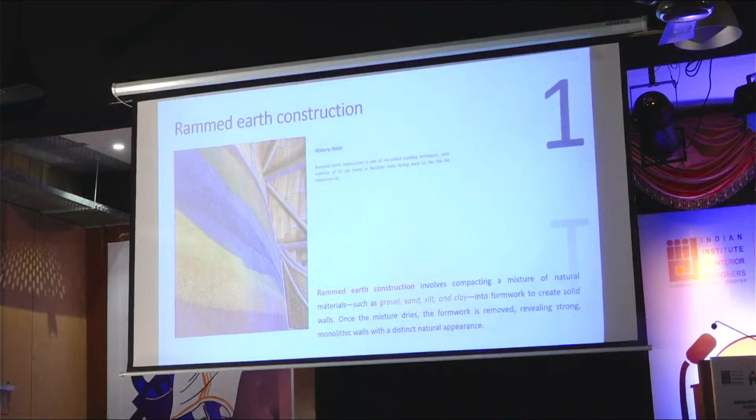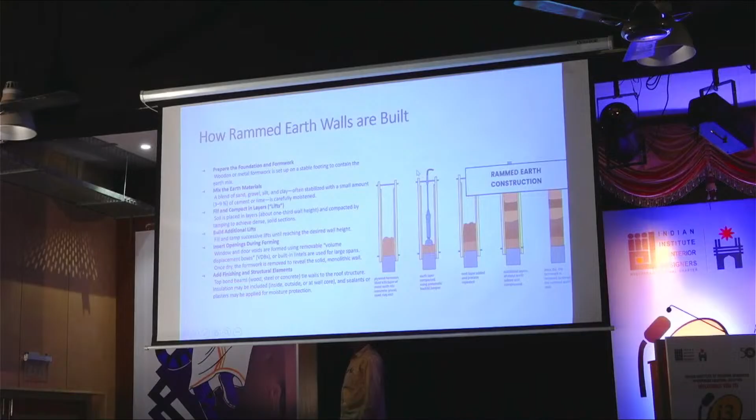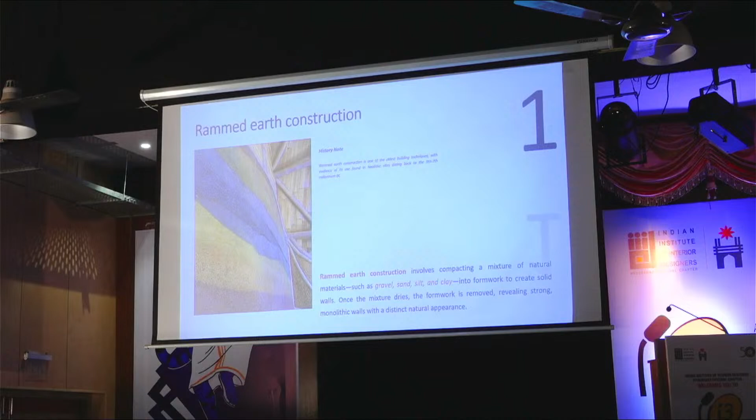So now coming back, let's come back to the picture. This is, you have seen, the history of this material is still there. We have used them in history, like in the Great Wall of China, Spain, and even Mohenjo-daro. Those structures are still active because it was just rammed up. Imagine 5,000 years, more than that, and it's still there.

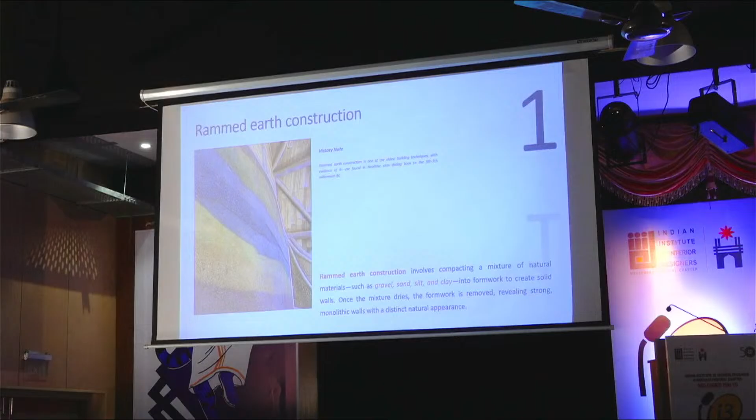Even in our villages, around the villages, we find them a lot here. If you go surrounding Hyderabad, we've seen this, and they have rammed it up, and the roofing system is done in stone. So coming back, next is, of course, this is the method they use, and this is how the sections and all are done.

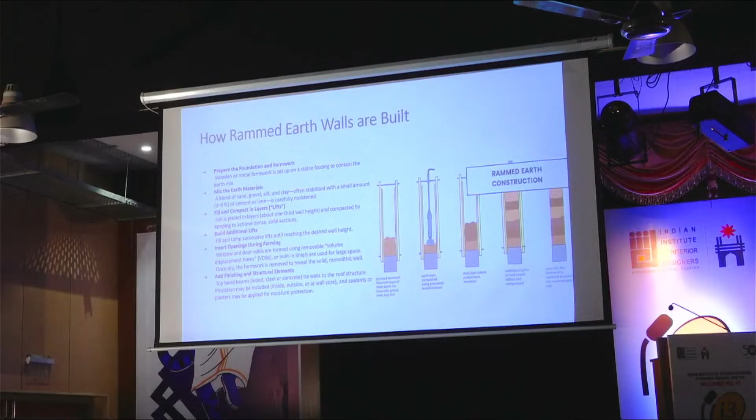So we can use pigments and all here to make it, where you can apply up to 4 feet. That's coming back, I mean this is what the technology is all about.

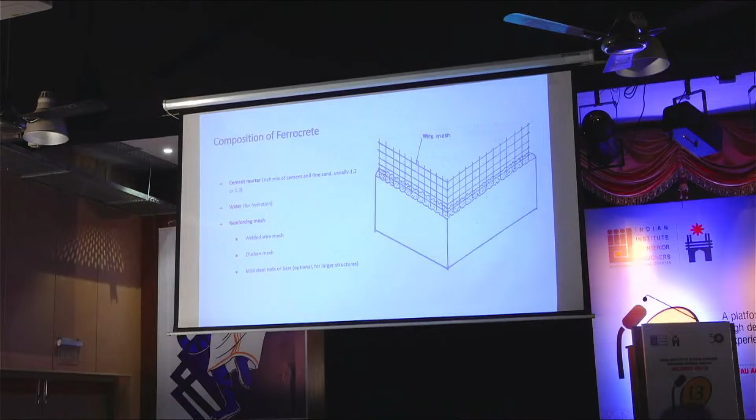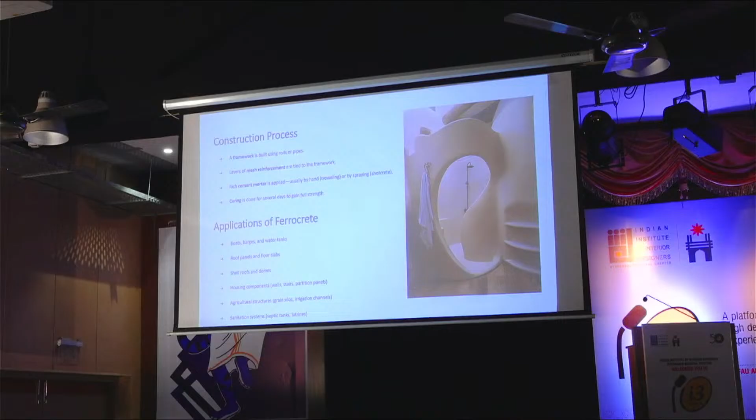This is one of the images to show you the limitation and scope of this material. You can actually make it dance the way you like. It turns, as you saw earlier, in the Mediterranean places and all. This is showering, which we have done in Chennai.

See, this is how a wall is being constructed. We wanted this kind of effect, so this is a mesh which goes and turns like this, and is anchored to the slab. Slowly we start applying a chicken mesh on that, and this is how you end up finishing the product.

This is what I'm telling you about the material, how it has been applied before, and what we tend to do with it now. Next.

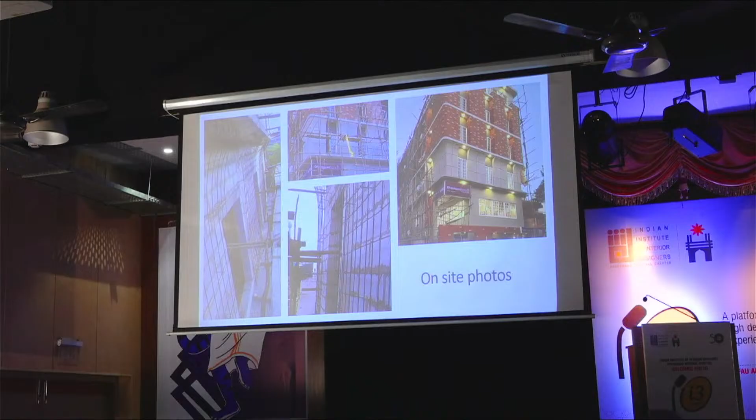So these are again images of our project here, which we are doing in Dundigal. This is a resort. I'll show you the video once the whole thing is ready, and you can see a walkthrough.

So this is a clubhouse. This is a farmhouse for one of my clients called Dr. Kranti. He's an orthopedician, and his father is also one.

Here we have three things involved. One is regular conventional construction, and the roofing is done in ferro cement. I'll show you the images later. These curved walls are printed in 3D with a pneumatic machine which can print up to 4 meters at a time.

There's a small swimming pool in the middle, very organically formed. This is the same project where we have the Yoga Shala - a 40-feet dome, and the whole 40-feet diameter is the dome. The entire thing is being done with brick, naturally.

The guys doing it are from Auroville, Pondicherry. You have an entrance where you get through, and then we have a lot of yogic poses there. And there are skylights, and right in the middle there's a fountain.

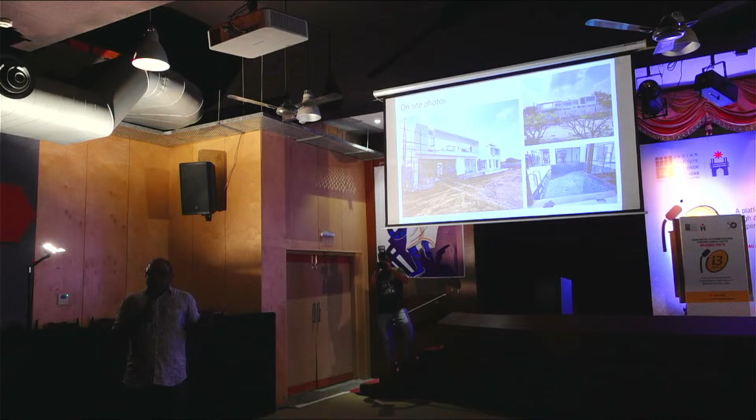So there's a lot of applications. You can actually put it at an angle. We are doing vaults with this. I'm doing one project in Vizag called Etikoppaka Toys for their office. Etikoppaka is a toy maker in Vizag. So for their office, I'll show you that as an image.

Now this is again a 3D printing. This is such a fantastic material. In Hyderabad, I'm using it for styrofoam also. In 2013, I was the first one to use it. I don't take pride in it, but I was the first one to use it. Later, more than 50 works have been done.

Now, this is again, we are doing it first time here in Hyderabad. We have 3 projects here. One is, I showed you, one is in Dundigal, the curved things. If you start building these things, normally there's no point, because every material has its scope and limitations, but how far we exploit them is up to us.

And then this is something where to build a 4-meter wall, a typical 1500 SFT house, it takes 4 days for the entire wall. You can leave the doors, you can leave the windows, and everything. So it comes up to 4 meters just in 4 or 5 days.

And of course, the slab is a conventional slab, load-bearing thing. Here, the wall thickness in the styrofoam is 5 inches. Here, it is 7 inches. So 7 inches goes like this.

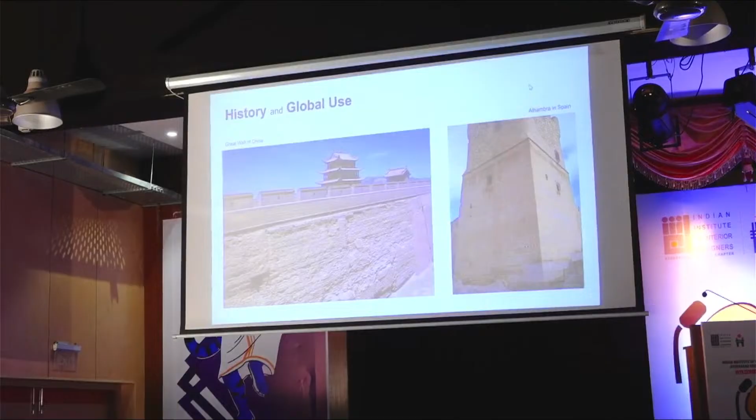It's a bio pool actually. So there is nothing like you get down and jump into the pool, actually you walk into the pool.

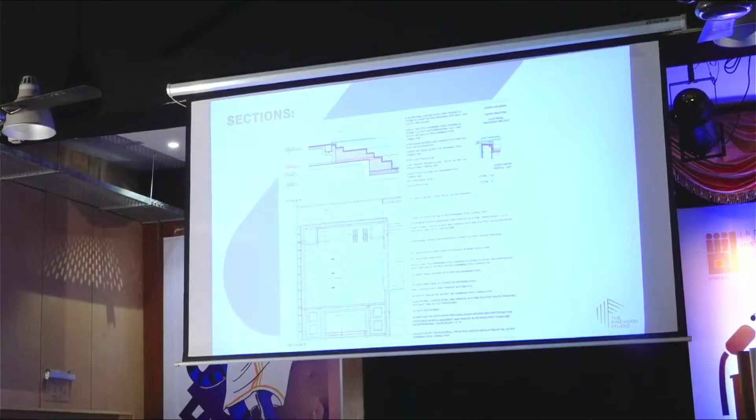The pool is the trickiest part of any project because it involves water, and water is very challenging to handle. So we need to ensure that all the right kind of services are incorporated when it comes to water bodies or pools.

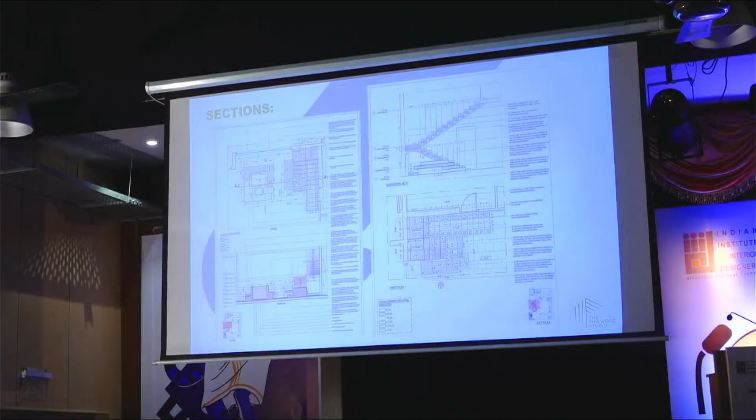These are some working drawings. When I see them from far, they look like too much to absorb, but yes, we have to do it for the site teams to execute.

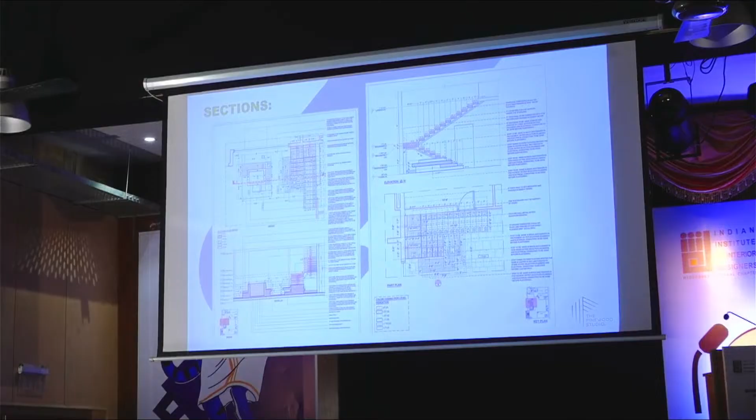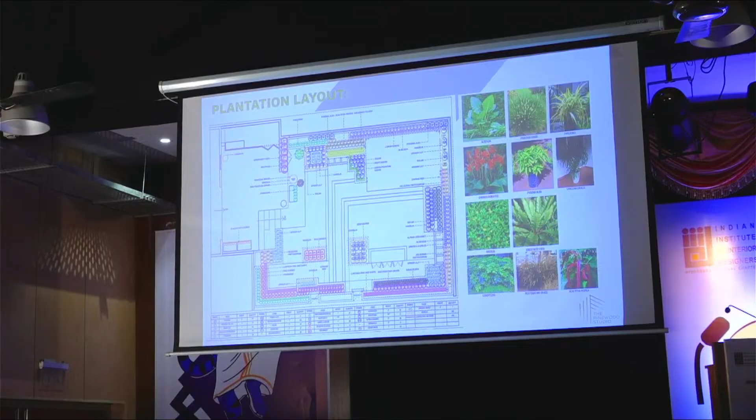And this is the plantation layout that we give to the site. This is the last bit of drawing that goes from our side. Before this, all the services, civil work, and finishes, that entire set is released to the site.

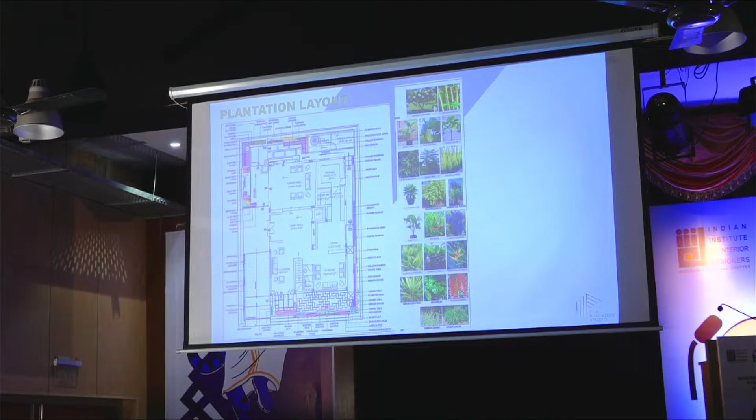We follow the concept of layering, and we also follow a lot of tropical planting palette. We use 3 to 4 layers depending upon the space available at a site: a tree planting layer, a mid planting layer, and then a shrub and ground cover layer. That is how you make the space look nice and lush.

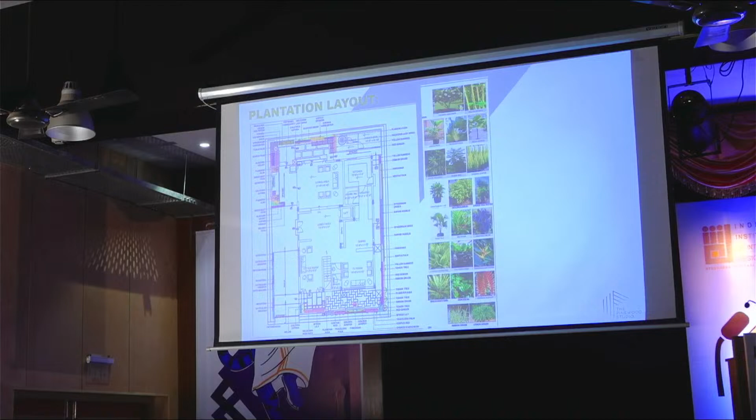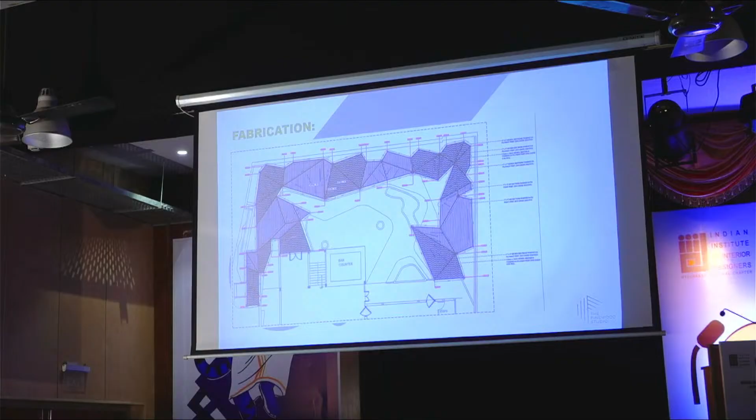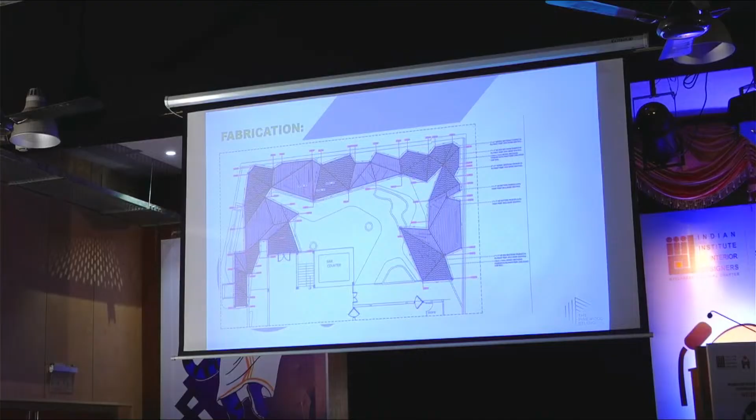This is the fabrication drawing for Taro. The pergola at Taro had a lot of different angles and planes. A lot of it can be shown on drawing, but I think for that project we spent the maximum hours on site to achieve the form of that pergola.

These are all fabrication drawings, showing how we create color indication and how we create grid planning.

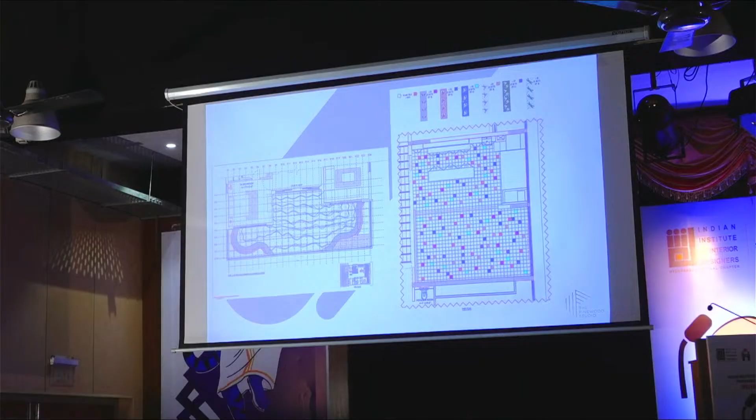This is Taro. All these were created as separate planes, and then they all came together. We also had to ensure that the water doesn't fall onto the visitors who are sitting there and enjoying their meal. So a lot of science and technicality went into achieving this structure.

I think you guys will understand we are clearly obsessed with boulders, because there is another boulder on the wall that is hung up, and this is a real boulder. This weighed somewhere around 3 tons, and it came all the way from Pondicherry. So we had structural members inbuilt.

This is a servant quarter wall, and we highlighted this entire area with stone cladding and created a nice seating. This element you see right here is standing just on one beam support at the back.

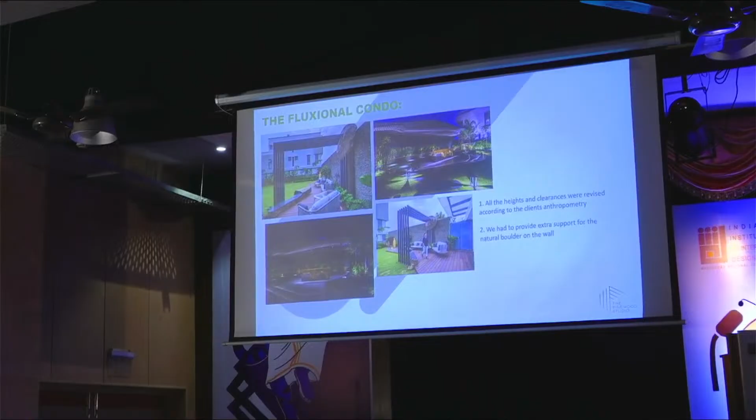There are no columns in the front, and there are 3 layers to this pergola. We worked with Zaki sir, who is a really great structural engineer from Hyderabad. Initially he was like, you go away from here, this is not possible, don't waste my time. But after a lot of follow-up and pleading, we said, please let's try to focus on achieving it.

We also have a curtain waterfall integrated into this back panel. As you can see, there are no columns in the front, and the weight is entirely onto this horizontal beam and the columns behind.

This is an actor's party pad, this is his terrace. We have designed a structure here which incorporates his movie names into this pergola, so when the sun is right on top, the shadows it creates are of his movies. He keeps adding the names as and when his movies release.

This was a COVID project. One of his movies had released during that time, and he did the launch of the movie from this place. As you can see, we have given 2 seating areas here, these are stepped seating areas, and this is the window that looks into his home theater. So they were all seated here and had a really good launch session from this side.

Drawings is one part, designing is one part of landscape. Execution is entirely a different ball game in itself. You have to coordinate with multiple teams and multiple consultants to actually achieve what you have designed and transform it onto the site.

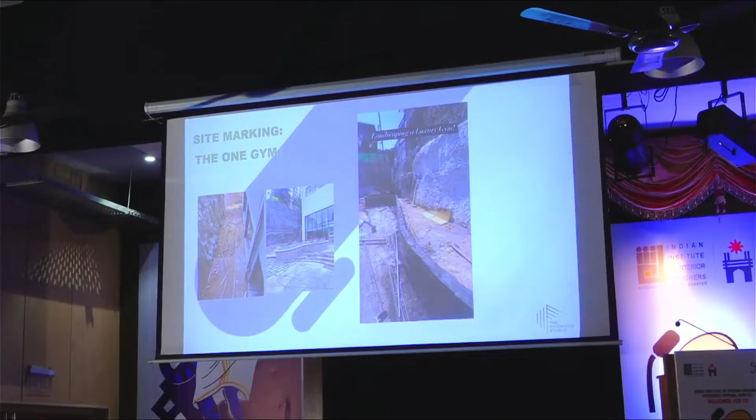This gym is located in Jubilee Hills, a very prime area in Hyderabad. We have a large frontage to play with, where luxury cars will be parked along with some outdoor seating. We designed the space to be a very luxurious outdoor landscape that looks very inviting.

I'm so sorry, something happened with the audio.

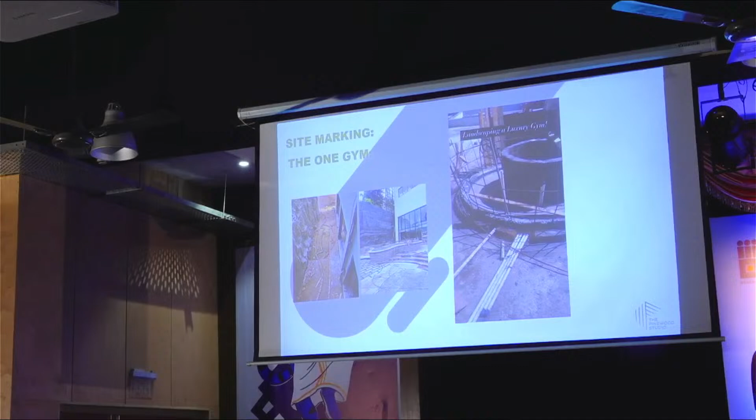Dumbbells to get these organic forms for the planters. There is a lot of detailing coming up. What I was trying to explain here is that we derived the concept of the planters keeping dumbbells in mind.

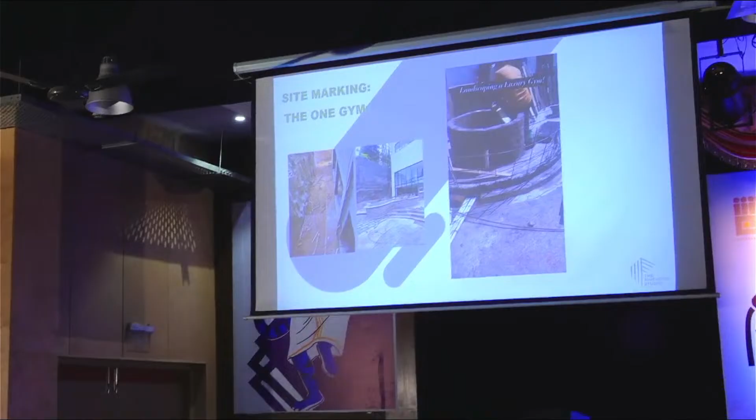So this is a luxury gym that has just been completed in Hyderabad. The forms you can see are inspired by dumbbells. Elements like the flooring pattern, if you can see, had curves, and the planters also had a lot of organic form to them.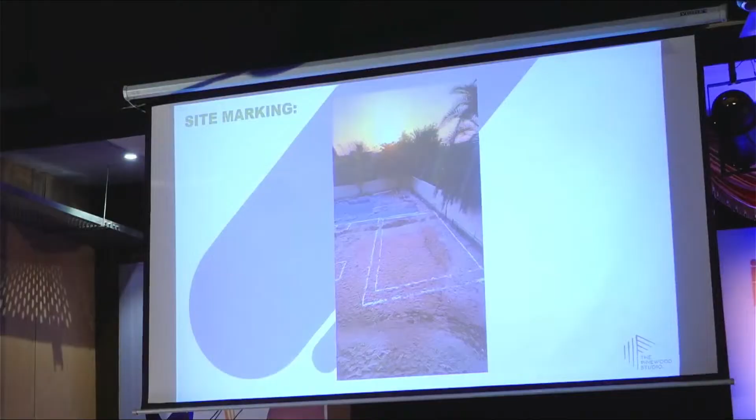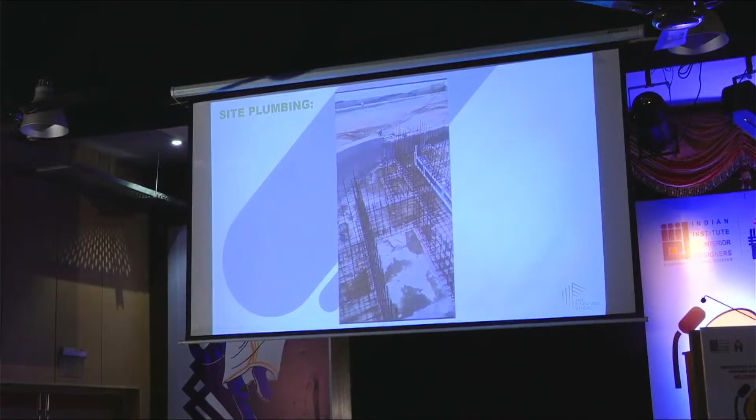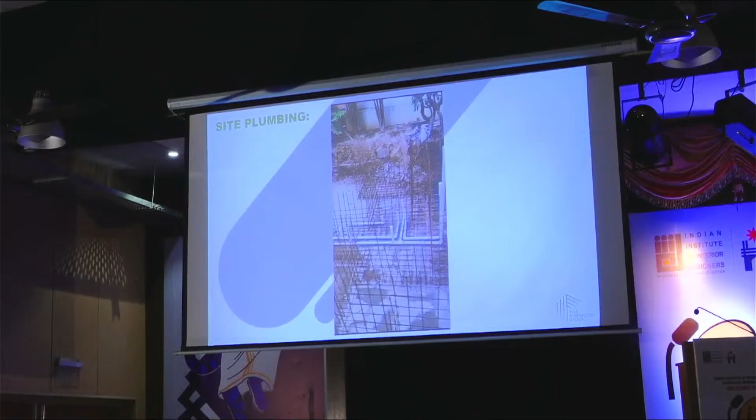This is a project that we completed in Dubai. Even there, we ensured the marking was done so the client had the exact output. This is the web that gets created when I explain about inlet and outlet for plants—that's the kind of web created on site. When we are creating planters on slab level, we need to ensure proper rainwater and plant water drainage is incorporated.

Plantation on site is the most exciting part of landscape design. When the site reaches the stage of plantation, we are all geared up and present on site to ensure all the placements are done rightly. We also ensure any gaps or fillers required are immediately communicated to the planting team, so that once the plant is placed in earth and soil, there is no movement, because they are tender at this point, and any movement of plantation will unnecessarily leave them in shock.

So this is how the entire site is currently looking, with loads of plants, and we absolutely love this moment on site—yes, it's very messy. Right after this, it looks so beautiful once the plants are planted and the floorings are clean. It completely transforms the space. This is an experience center that we have done, called Trilite, again in Hyderabad.

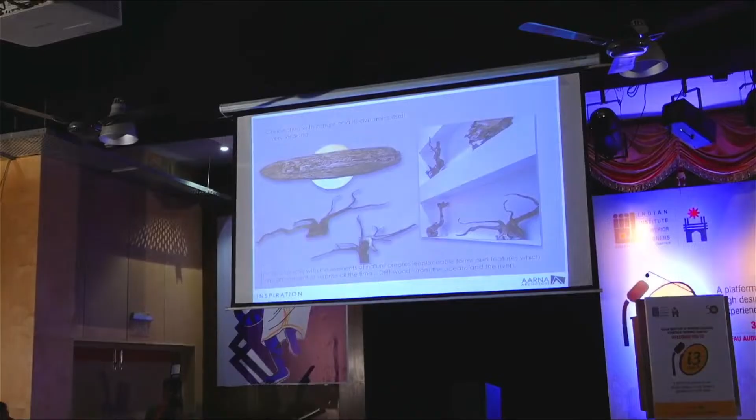So I try to keep all of this very close to me. Whenever I travel, I pick up these cute patterned pebbles across the Mediterranean or other coasts. This is driftwood that whenever we are in Goa or sort of thing, we try to stuff it into the luggage as much as possible. These are all the things that keep me close to nature in an urban setup. Now I can't run to a farmhouse every day, and neither can I do it over the weekends, so these are the little things we do.

Of course, travel is a great source of inspiration, like for all of us.

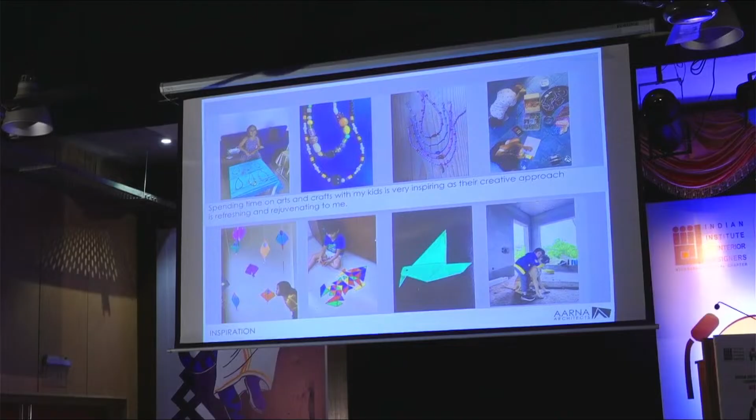And this is something else I realized after having kids - there were a couple of years I couldn't do much because they're quite young, and I said, how? But you can't stop yourself, right? So when I was sitting down with them to do their craft, some of my projects actually have an inspiration from this. My daughter was into origami, and I'll show one of my projects later which I did after they grew up, which actually has a connection to the way they did art. My son was a little more bold in his patterns, she was a little more delicate. I said, you know, all these are also things you observe, small things.

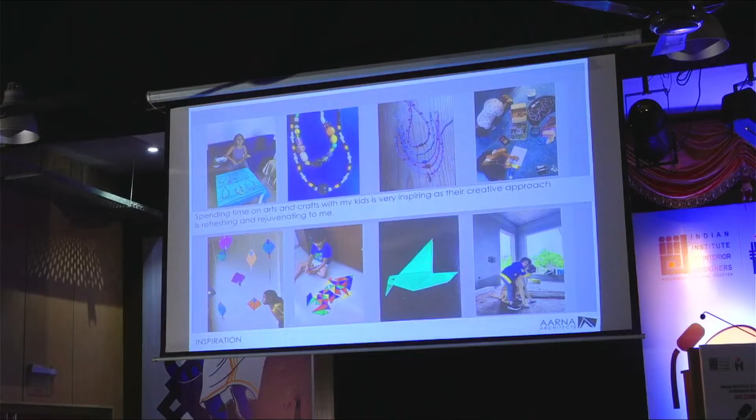These were a couple of courses that I was glad to do with all the family responsibilities as well. I went to Milan for a good course, and then I did a Green Skills Academy course in Bangalore. We do have some mud homes also, which we've done a course in, and we have more clients in Bangalore and Mysuru for that.

I'm married to architect Ravi. So what I did, or what was my destiny, was when I went to Bangalore, I brought a bit of Bangalore also back with me in my personal life. He is from Bangalore, he supports me at the back end of the office, and he's into construction in Bangalore, so he shuffles.

These are some of the early works which I did on my own. The reason I'm showing these is also because these maybe don't have the philosophies that I've developed over the years for my firm. These are things from before I established the firm, but I'd like to show you so that you can see a little bit of a gradual journey there.

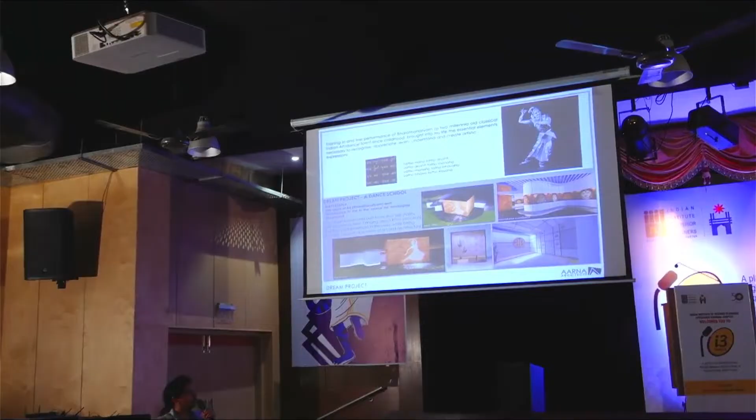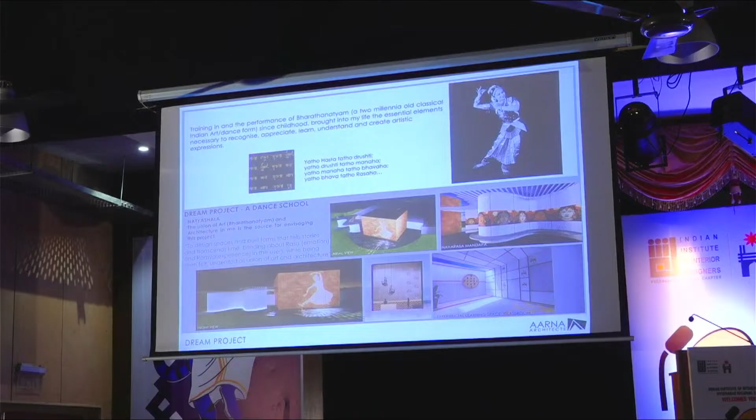Because there are a lot of divisions in this dance form - eye movements, hand movements - so have sculptures, have the waiting areas glorifying the reception area. Generally glorifying the art, because what I can do as an architect is make the space really resonate with what the person can feel. So, using the new age materials, why not something like this?

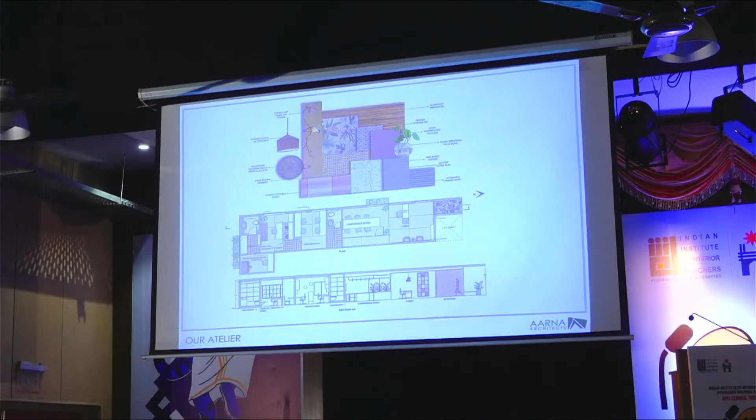This is our very own little atelier. We called it the train bogie. It's about 800 square feet in a linear format. This was actually a duct space, an open space left by the builder. This is a commercial building in Banjara Hills, so we cut it open to make an entrance and pushed the pipelines to the side.

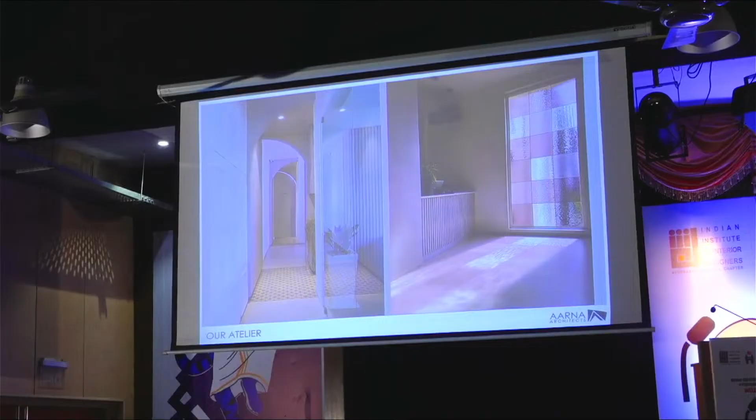We also love a lot of natural light as much as possible. There's only one side where we could have the advantage of lighting, so we kept the palette soft and kept the volumes a little interesting, so that we can walk by this avenue every day with a good positive vibe.

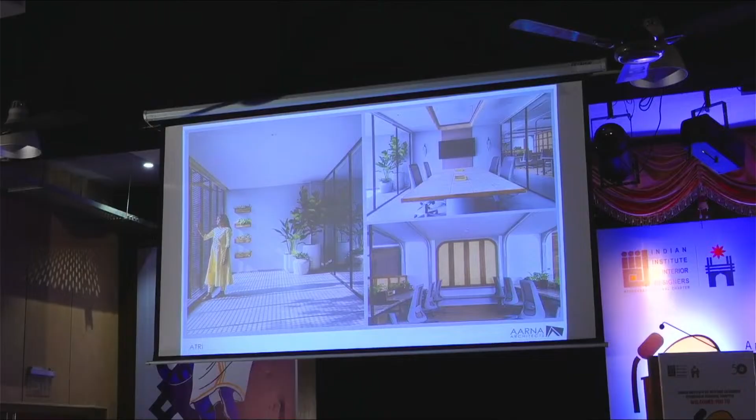It's the same client who wants to redo the office for the younger generation, for his kids. I asked why they weren't using it. They said it's Vastu. I said okay, fine, then we'll give you light from there — we'll use the conference room, put the conference there, and it'll really help the rest of the space. They were okay with that and got it checked.

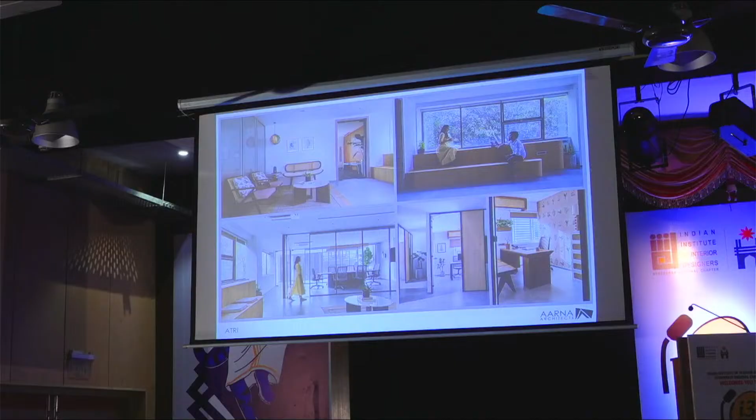And that really transformed 50% of the 3,000 square foot office. But when they're not having conferences or meetings, it really helps keep the space bright. They're really happy with the place. Now we're doing a 20,000 square foot office for them on road number 45.

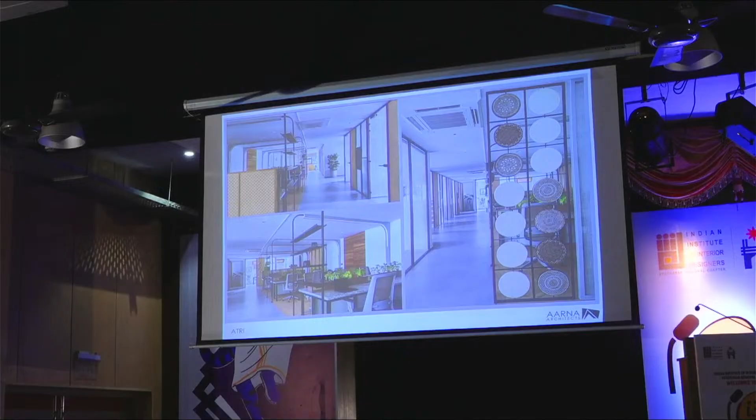These are Rajasthani textile blocks — they're very close to us, and we use them in most of our projects. This is an interactive mandala panel, based on what they use for sari printing on cotton saris. So we pick these up and use them in various forms — in our office, it's like a ceiling element.

This is a farmhouse in Shankarpalli.

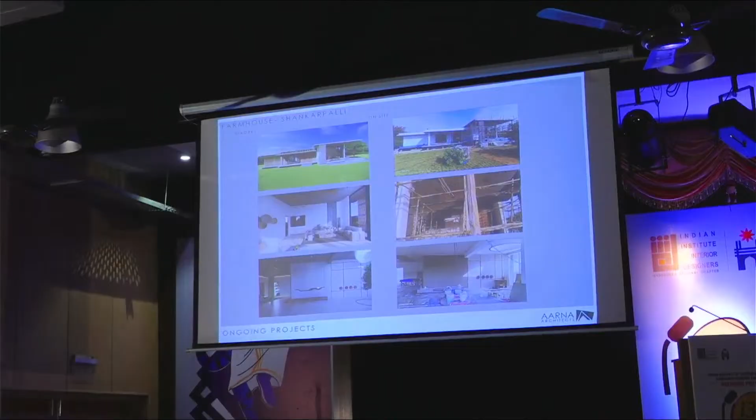So here what you see is, one day we were at site, it was just the foundation level, and we figured that between 5 to 6 in the evening, there are these migratory birds that kind of fly over this house. So we thought, why not translate it into interiors?

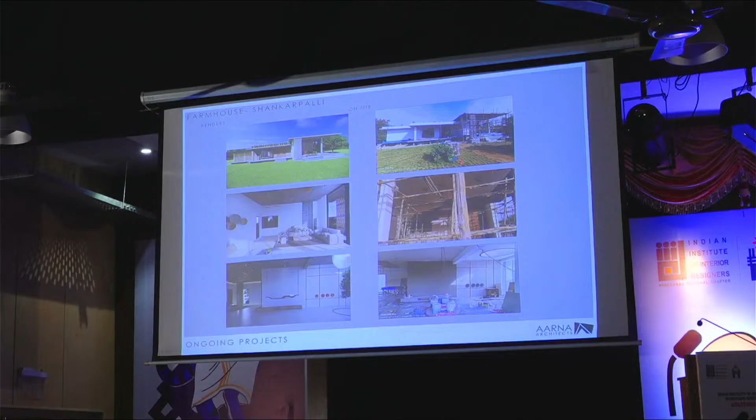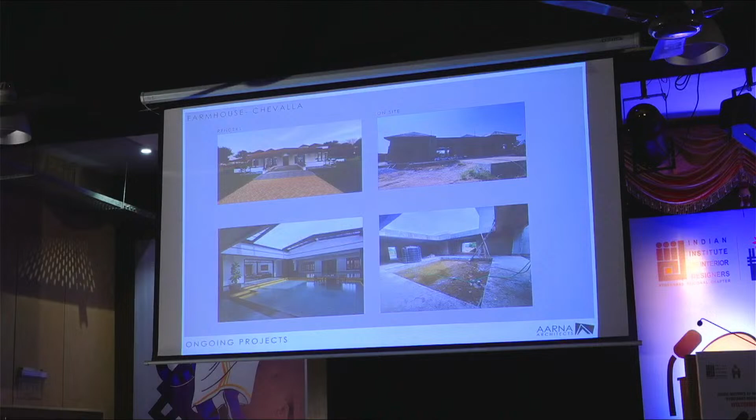Some on-site improvements there. This is another 16,000 square feet central courtyard home in Chevalla.

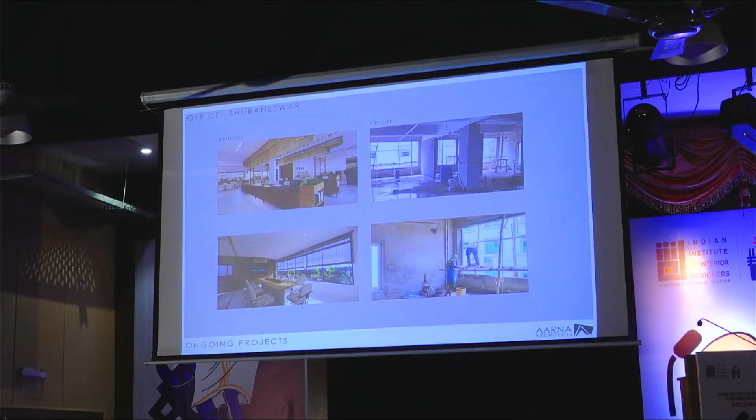There's another big villa, about 20,000 square feet villa in Kondapur. Excited about these. This is a dining space that we are curating and designing for 500 capacity in Woxsen University.

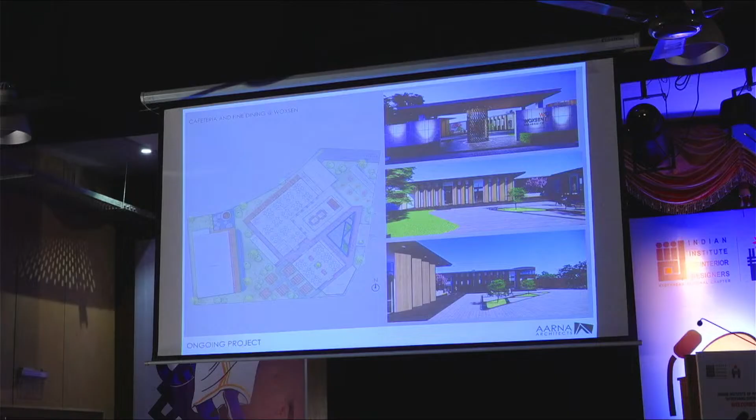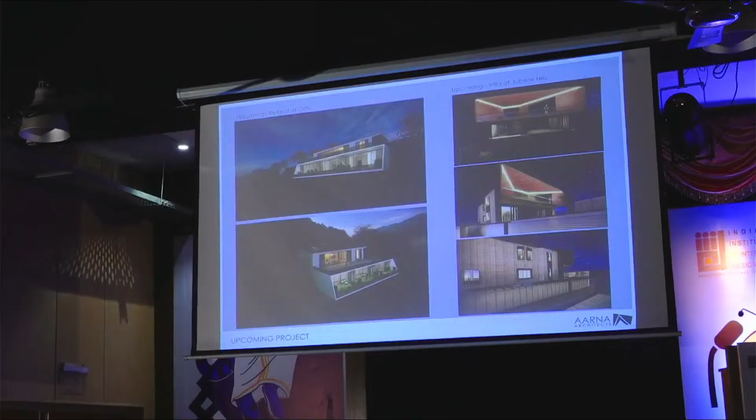This is a home in Jubilee Hills we are putting together for the client. This is a vacation home in Ooty that we are doing.

The other day I got a call from Sir Nara Lokesh's office saying that they've decided - I didn't put up the project here - we've done a VIP guest house in Tirumala, where we stayed for 2 nights after the swearing in last year, after the Honorable Chief Minister took over. They really liked the place and I got a call, and recently, because of security, we're not allowed to take pictures of the spaces inside the 6,000 square feet villa in Kuppam, his home constituency, very close to his heart, because his 42 years of victory is from there. And there's another 3,000 square feet office space also, which we've done, curated for Sir Lokesh.

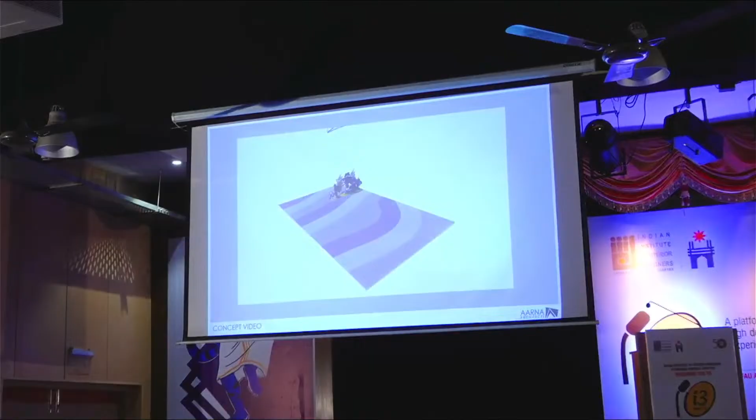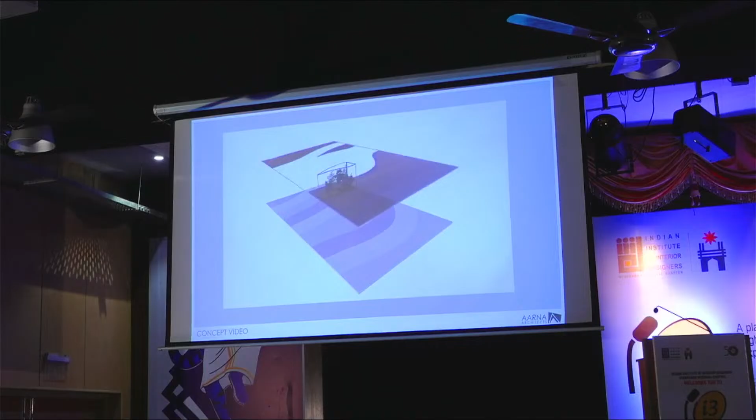When he said a beautiful lady in a beautiful cotton sari, we could think of how flowy a sari is generally. So it is just a 9 feet height space that we were given in a commercial block. So why don't we take inspiration from the fluidic form of the sari when the woman is walking in an open space. So trying out terrazzo flooring in wavy patterns, seeing some more organic forms in the ceiling, bringing in a little bit of courtyard, a little bit of clay there.

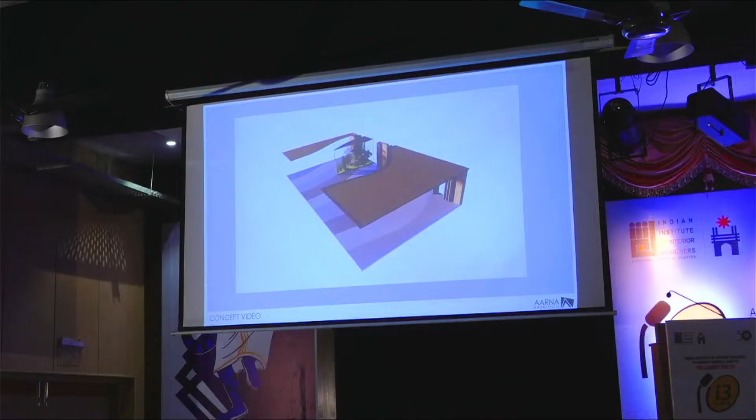Hopefully this should be something, it's going to be done in a month now. Hopefully this should be something that is not too glamorous for his office boy. And I don't know how to put it, I hope even the ministers of Andhra Pradesh, the government ministers also enjoy this space which we are putting together.

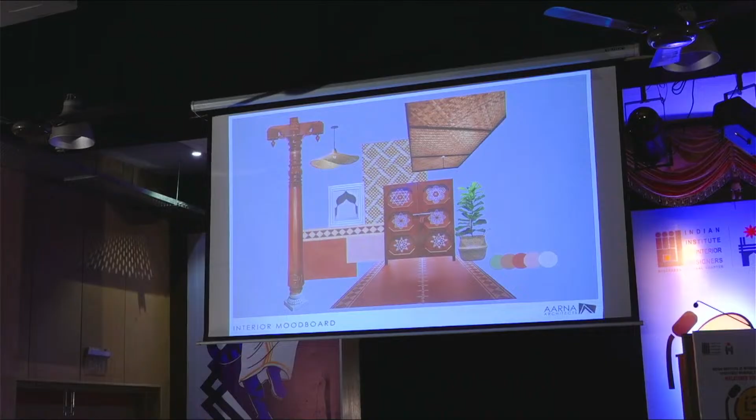That's how we broke down the concept. This is a month ago when it was being done. This is another small thing we're doing for TDP called Stree Shakti. The reason we took it up is because it's for women empowerment. Bhuvaneshwari ma'am, they're training... the last 2 slides this is.

You shouldn't stop yourself, they definitely respect us. There's nothing that is going wrong, just take care of your safety. You'll wonder because now you're always with a bunch of friends, but later it's not going to be like that in practice. So don't give up, and if you are lucky enough to have a partner, like sometimes 2 women architects are in a firm, right? But that also doesn't mean they both go to the same site at the same time, they have to run a commercial practice.